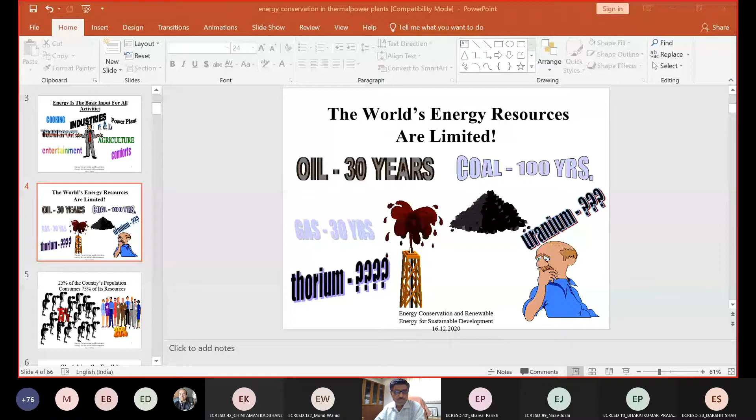Sir, sorry to interrupt you. I think the slideshow is not being shared. We are seeing the first slide only. Oh my God. Let me check again. And it is not in full screen, so we are seeing a small slide only. Is it now visible? Yes, sir. Now it is on full slide. And now it is changing. Okay, so let me brief the first slide.

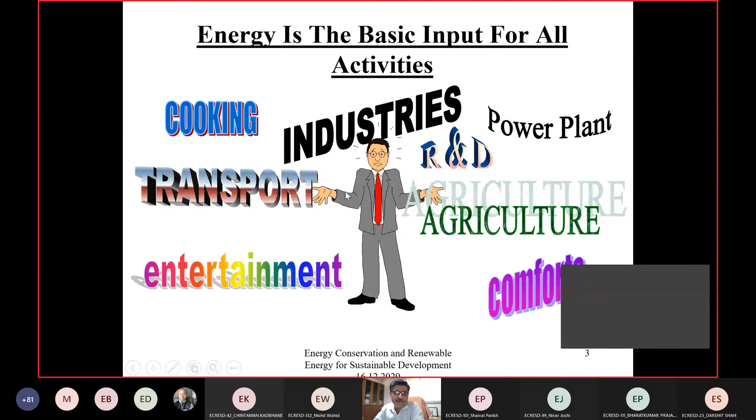What I discuss is about this, that we use energy in our day-to-day activities, and we need to map out how much energy is being used in each activity and how can we reduce the energy consumption as far as the conservation is concerned. And I was on this slide that typically, today we get mostly our energy from the conventional sources, be it oil, coal, or natural gas. Over and above, we use uranium, thorium, etc. to get the electricity.

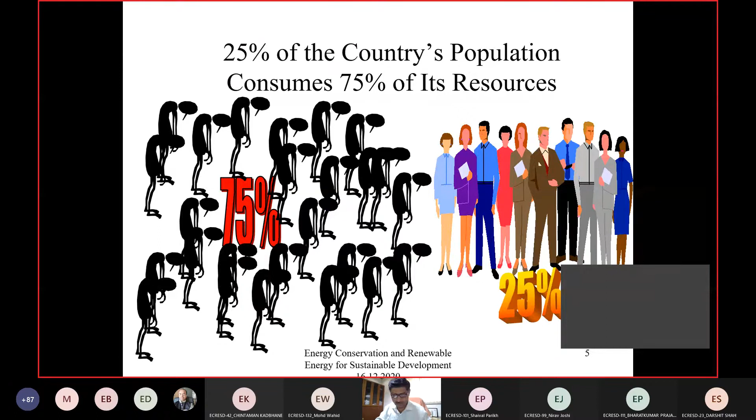On the world front, if you see, the total energy consumption by the developed countries is much higher as compared to developing countries. I will discuss that number later on. But just to give you an indication, our per capita electricity consumption is about 1200 to 1300 kilowatt hour per person. If you find the same for a US citizen or Canadian citizen, it may be about 20,000. So it is even more than 10 times. So the 75-25 rule also holds applicable, right, to these developing and developed countries as well.

Next issue we address: typically, in order to grow, any country has to increase its energy consumption. So we need to find out the different ways, different opportunities from where we'll get the energy. So on one side it is the energy crisis, and if you get rid of this energy crisis, you will get into the environmental crisis. So it's a twin issue: in order to get rid of one, we are getting the problem in the other. So we need to balance between energy consumption and environmental degradation at the same time.

Most of the environmental problems are related to energy utilization, and reducing energy consumption will certainly reduce our environmental problem to a larger extent. So if you can solve at least 25% of your energy requirement by energy conservation or by reducing energy consumption, probably we may address the environmental problem to a larger extent. I'll give you a simple example.

There was an article 3 days back in Gujarat Samachar, and it was cited that the total carbon emission of the world has been reduced by 240 crore metric ton this year compared to 2019. If you see the pattern over the past 10 years, this number has increased at the rate of 7%. But because of this corona pandemic, the total energy consumption has gone down, and in comparison to last year it has gone down by almost 7%. So with 7% increase every year and this time 7% reduction, ideally it has been a 14% reduction in comparison to the previous years.

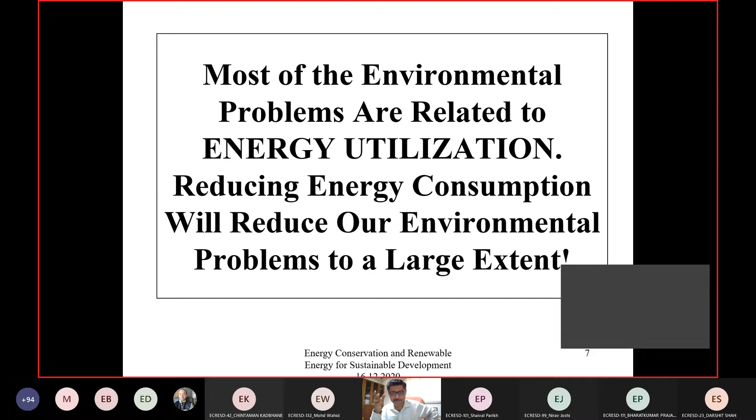China unfortunately pollutes the maximum. It is polluting double than the US and 4 times than India every year. The carbon emission per second at world level is about 1,000 ton. So you can imagine that the issue of the environment is much larger as compared to the issue of energy. If you solve one issue, probably you will jump into the other. So the only option is conservation. By conserving energy you can solve both: your energy demands are set off, and at the same time we are not polluting the environment.

Development of the nation is measured in terms of per capita energy consumption, whether we believe it or not, true or false. But obviously, in order to grow, in order to be in the developed countries list, you need to consume a lot of energy, because unless you consume energy, development is not possible. Any developmental activity ultimately leads to energy consumption. So more energy consumption means the country is more developed, will be using more energy, and will be polluting more as well.

On the contrary, if you see the total contribution of carbon emission, I would say 75% is from developed countries; hardly 25% is the real contribution of the developing or underdeveloped countries. So to increase per capita energy consumption, we'll have to be prepared to manage the related pollution issues as well, which are also increasing proportionately.

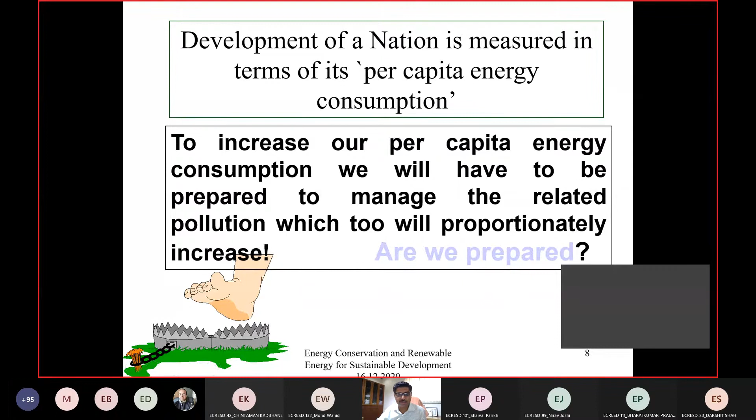Now here we'll try to define energy conservation. The first myth is that energy conservation should be considered as curtailment of energy use. Simply, if my energy consumption is 1500 kilowatt hour per year and I reduce it to 700, it is not conservation. Conservation is really meaningful if you are not compromising on the services. Suppose you have 4 tube lights in a room and you reduce it from 4 to 2, it is curtailment, not conservation. Rather, you need to maintain the total lumens of that workspace with other alternatives consuming less energy; that is really energy conservation.

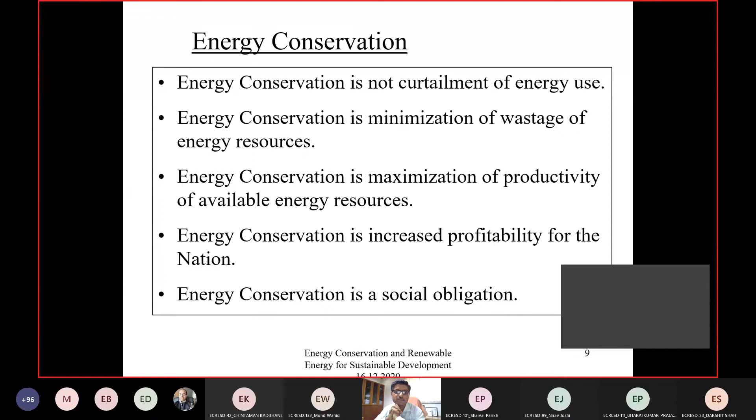So here we define energy conservation as the minimization of wastage of energy resources and maximization of the productivity of the available energy resources. It will ultimately lead to profitability for the nation, and obviously it is a social obligation. So for the betterment of society also, we need to conserve energy.

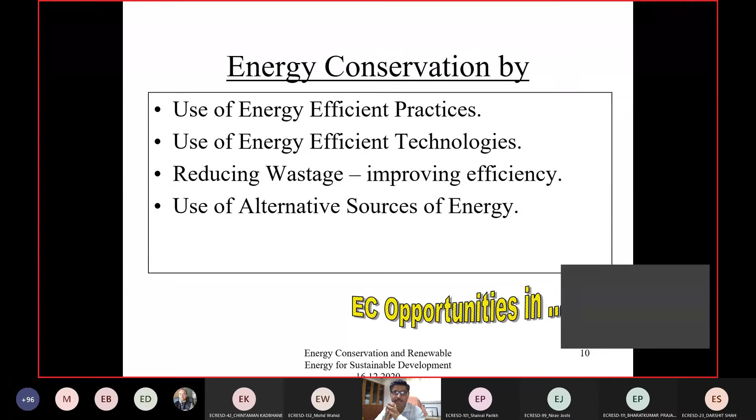Now we can conserve the energy by energy efficient practices and energy efficient technologies. We can conserve by reducing the waste and using alternate energy sources. So these are the 4 ways by which we can conserve the energy, and we can also address the pollution and environmental issues.

If we see the energy efficiency, generation is lagging behind requirement. In the Indian context, we still have a peak deficit of electricity of about 15%. Base deficit is about 7 to 9%. So you still have frequent power cuts in the villages. You don't have electricity access 24 hours. Farmers have electricity access for only 8 hours.

So even though we say Gujarat is an energy surplus state, if we really look into the energy demand by the farmers, as on date it is still not met. So our generation is much less as compared to our requirement.

Depletion of natural resources which are not renewable: we still depend mainly on them, as 75% of our electricity comes from the conventional route. Whenever 1 unit of electricity is consumed, 1 kg of coal is being used. So by thumb rule, every unit of electricity generation requires 1 kg of coal. And if you generate 1 kilowatt hour or 1 unit of electricity, typically we degrade the environment by 1 kg of CO2.

So it goes hand in hand: 1 unit requires 1 kg of coal, which pollutes the environment to the extent of 1 kg of CO2. So the environmental conditions are becoming worse every year. On the other hand, if you save 1 unit of electricity, it is as good as saving 2 units at the generation end, because mostly our electricity comes from the thermal route. Thermal power plant efficiency is about 25 to 30%.

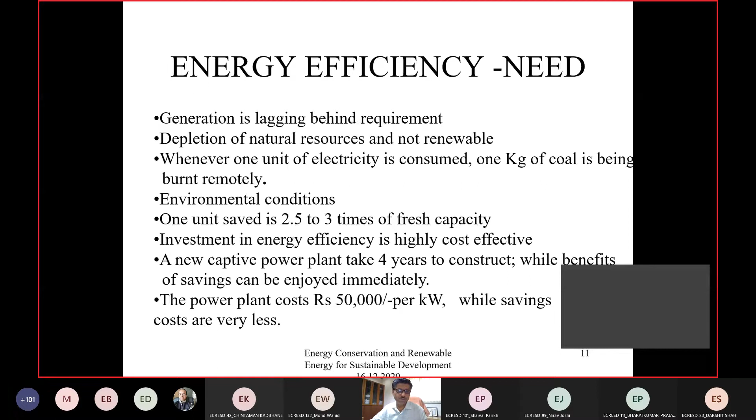Saving cost: yes, when we talk about conservation, you need to improve the efficiency of the machines, and that will not be free of cost. We need to invest, we need to put money. Sometimes we need to retrofit the existing setup. So it is not free of cost, but the cost of the saving opportunity is much less compared to the investment we would make creating new power plant infrastructure.

So we have seen the benefits of conservation. Then what are the barriers? Why are we still struggling to percolate this particular issue in society? One is the lack of awareness, education and training. So we need to have more sessions, right? Even it is difficult to educate the engineers, so understand how difficult it is to educate the common people.

There are several market distortions, economic distortions, lack of standardization. Of late we have started labeling the equipment as far as ACs and refrigerators are concerned. Now we have 3-star, 5-star rated air conditioners or refrigerators. But this kind of rating should be available for most of our electrical appliances. Lack of financing, lack of effective coordination. These are the several barriers to energy conservation or energy efficiency.

And most important is the feeling that everything possible has been done, that there is no more opportunity to increase the energy efficiency. That feeling has to go if we really want to move out of the barriers of energy efficiency. Every small step towards increasing the efficiency will ultimately lead to energy conservation. A mistaken feeling that energy monitoring and energy reduction equipment are expensive should also be removed.

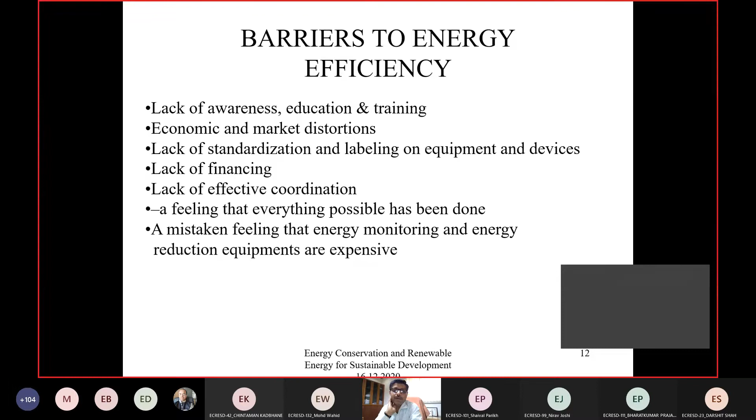As far as the Indian scenario is concerned, our energy intensity is poor as compared to the developed countries. Some numbers are cited over here. Energy intensity is defined as the amount of energy required to generate one unit of GDP. So lower the number, better the scenario. If my energy intensity is less, I can say that I am using less energy to generate the same unit of GDP.

So if you see here, we are consuming 3.7 times more than Japan, 1.4 times more than Asia, and 1.5 times more than USA. So our energy intensity needs to be improved, and we can improve it in two ways. Either you increase the energy efficiency of the existing equipment, or you need to find out where your GDP comes from. Being an agriculture based country, our GDP mostly comes from agriculture.

If you compare a country where the majority portion of GDP comes from the service industry, their energy intensity would be better, because in the service industry you need a room, a space, a computer and electricity, that's all. If your GDP comes from the manufacturing sector, your energy intensity will be poor, because you need to operate your machines, and that consumes a lot of energy. So energy intensity will be more where the major chunk of GDP comes from manufacturing. So this is one side.

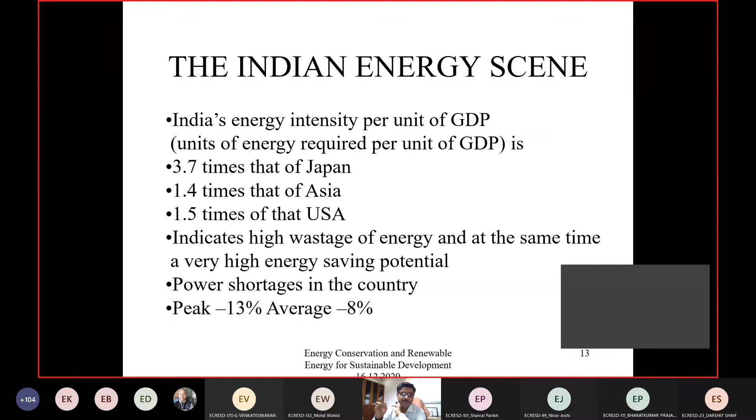This indicates high wastage of energy, and at the same time a very high energy saving potential as well. If your energy intensity is high, that means there is a larger potential for energy saving. So we can take that as positive, that we have a lot of energy saving potential. And as I said, power cuts are frequent. Here we have 13% peak shortage and 8% average shortage as far as India is concerned.

We are the second most populous country in the world, and we grow at an annual rate of 2%. This is very important because as the population increases, we need to increase our energy generation capacity as well. And since the population is large, our per capita energy consumption is less. It is 1200 kilowatt hour per person per year in comparison to 2000 kilowatt hour per person in China and 14,000 units for USA.

We are the sixth largest energy consumer in the world, and we expect our GDP to grow at the rate of 7%. No doubt this year our GDP is negative, but if you take the GDP growth from 2001 to 2020, the average growth is about 6 to 7%.

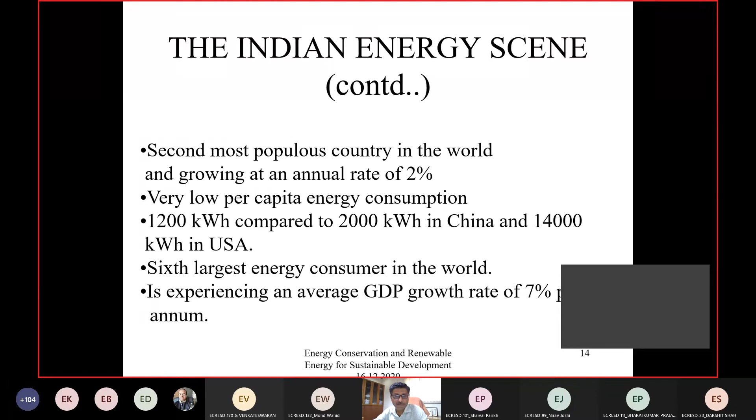As per the definition of energy intensity, if your GDP grows, you need to also grow your energy availability. So in line with the GDP, if you have the energy intensity number available, you can find out how much energy is required and what will be the growth rate required for energy as far as the nation is concerned.

So government has taken several steps. Since every 5-year plan, there is a separate section for energy, and the Ministry of Power takes care of that. All energy options are to be exercised to take care of the increased energy demand. However, in our context, coal has remained the mainstream energy source as of now and in future also, say till 2030 or 2035. I expect coal will be the major energy source in power generation.

Government has focused that new power plants may be either nuclear based or renewable energy based. So much emphasis is now given on nuclear and renewable energy as well. As far as hydro is concerned, most of the energy has been tapped, and by year 2025, the goal of the ministry is to tap almost 100% power from hydro. So hydro will be mature by 2025.

15% saving is to be achieved by energy conservation. So our energy demand is growing, right? Typically, suppose our energy requirement in the next 8 to 10 years increases by almost 70 to 80%. It is believed that whatever is the total generation capacity by 2035, we need to add the same number. So 100% increase is expected by year 2035, out of which 15%, if we can contribute to energy conservation, there will be a reduction in the burden of generating electricity through thermal or other routes.

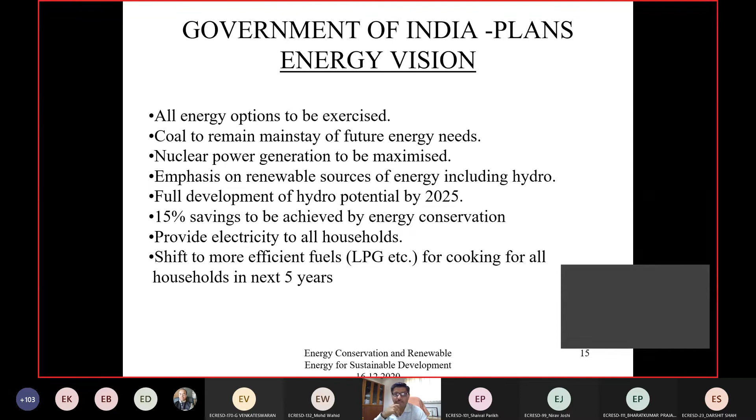It is also envisaged, as per government plan, to provide electricity to all households and to shift to more efficient fuel, that is LPG, for cooking for households in the next 5-year plan. So this is typically the energy vision of Government of India for the next 5 years.

Now, what is the solution? We must use all available fuel options, be it nuclear or non-conventional sources, under comprehensive NEP. There must be pursuit of improving energy efficiency at all stages, not only at our consumer end, but at generation and also transmission end, because as I said, our transmission and distribution losses are 16 to 20%.

If you see the same number for developed countries, it is hardly 3 to 5%. So we need to improve our transmission lines. We need to improve the efficiency of the generation machines, and not only that, we also need to improve the efficiency of the machines at the consumer end. It is believed that 2.5 units of capacity addition may be avoided if you save 1 unit of electricity by any of these means.

Investment in energy efficiency measures is cost effective and sustainable. Improving energy efficiency would be the most effective method to tackle the shortfall and sustain the country's growth trajectory. It is also far less expensive to save energy than to generate new power. And by doing this, we can save almost $1,200 million every year for India.

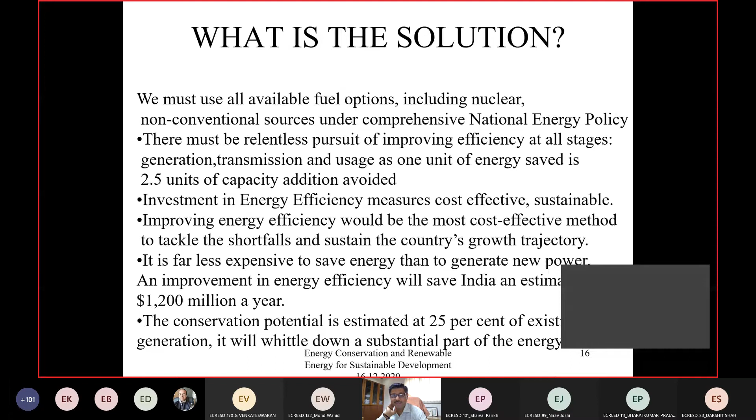The conservation potential is estimated at about 25% of the existing generation that we discussed, that in time to come we need to improve upon our energy generation capacity. But if we go for energy conservation, at least 25% of total new generation capacity requirement can be reduced.

Now, having discussed energy conservation and its other issues, let us focus on how to conserve energy in our thermal utilities. So here I will discuss first pump, then compressor, and finally we will have the discussion on boiler.

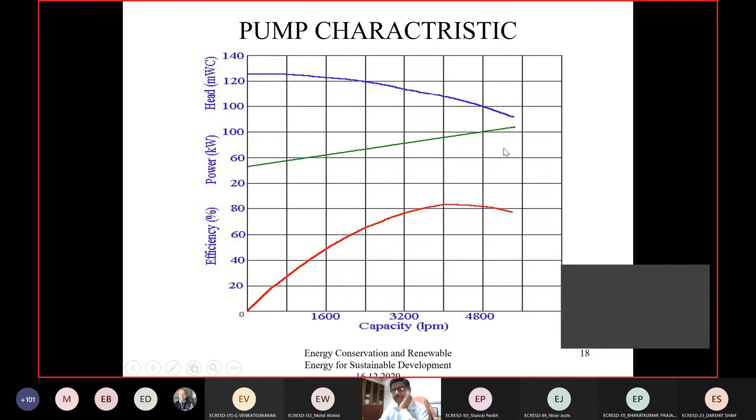If I increase the capacity, obviously the head will decrease because total power is rho G Q H. Rho G is constant, so if I increase Q, H will obviously decrease. So depending upon our head requirement, we need to choose a pump from the pump characteristics that at a given discharge satisfies the given head requirement as well. Power increases with the increase in capacity, that is but natural.

So if you go through whatever I have discussed, the last point indicates that pump efficiency with flow decreases, and maximum efficiency is significant as compared to motor. Motor part load efficiency is good, but in case of pump, part load efficiency is very poor. So if I operate my pump at 50% flow rate, then efficiency will drop by 20%.

There is a straight reduction in efficiency, and this 20% decrease in efficiency straight away means that you are consuming almost 20% more power to operate the pump. However, if your efficiency is not decreased, then typically you can save the power. So that gives you the energy saving opportunity in case of pump.

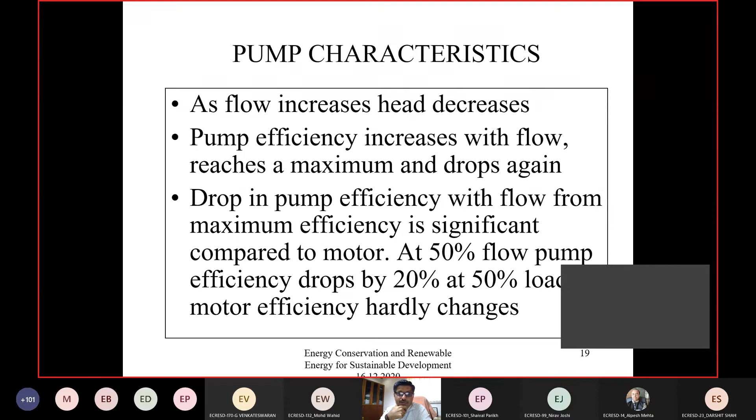I need to operate my pump in such a way that even if my discharge requirement decreases, the efficiency should not fall. However, we have discussed through pump characteristics that for a given speed, if I decrease the discharge by throttling it, the efficiency has to decrease. That is the negative part. So we need to identify, or find out the ways, where I can reduce the discharge and at the same time my efficiency of the pump will not decrease.

The other characteristic which is very important is that at zero load, the pump also consumes almost 30 to 40% of power. Whereas if a motor is operated at no load condition, the total power required to operate the motor will be 5% of the full load. So motor is not the culprit, as far as the pump motor system is concerned, if I talk about the system as a whole. Pump is the real culprit, where we need to work on how we can increase the efficiency of the pump. Hardly can you increase the efficiency of the motor.

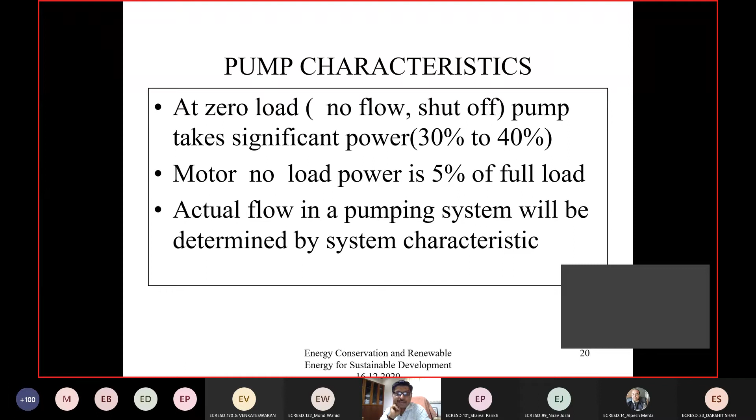So in actual flow in a pumping system, rather than talking about the pump characteristics, we should address the system characteristics. Here both characteristics are shown. This red color indicates your pump characteristics, the head versus discharge. While if you see the system, the blue color line, at zero load, the head is almost 40, which is the static head.

When you throttle it, or rather when you increase the flow rate, the system head increases, and that increase in the system head will be the square of the velocity. We know the frictional head, if total head is the sum of the static head plus frictional head, and frictional head by Darcy's formula, 4FLV squared by 2GD, is proportional to the square of the velocity. So more flow in the same cross section means more velocity. If you increase the capacity, obviously frictional head will increase.

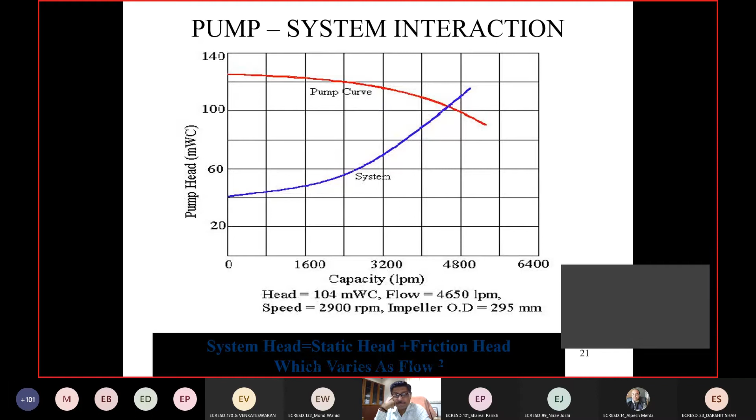And the intersection of pump and system characteristics will give you the best efficiency point. So if you plot your efficiency curve, probably you will get the maximum efficiency at that point. This gives you typically the centrifugal pump characteristics for the given model and given condition.

So all these typical lines indicate the head versus discharge characteristics at different RPM. And if you rotate your pump at different RPM, obviously you need different power. So I could say that this is also a power versus discharge characteristics curve, and these parabolic curves are your constant efficiency or ISO efficiency curves. So if you have all these three pieces of information, you can find out the best operating range. If suppose my requirement is 150 gallons per minute, or about 35 meter cube per hour.

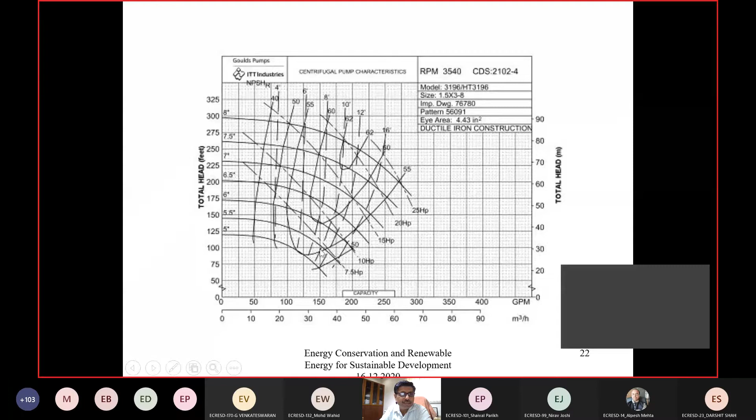So you can get that combination at various rotational speeds. If you operate your pump at 25 HP, getting that particular thing, obviously head will be more, but we are not required that. Suppose my head requirement is only 100 feet. So rather than operating at this particular point, I can choose to operate my pump at a 7.5 HP line, or this particular speed, so that the total power requirement will be less.

So it will be more and clearly visible over here. Here I have taken one reference pump characteristics and one reference system characteristics. Let us assume I am operating my pump at this. So at present my flow requirement is 12,000 liters per minute. Now if I want 12,000 liters per minute, and if I am operating over here, the efficiency is about 86%. Now suppose your flow requirement reduces from 12,000 to say 9,000.

So one way is to throttle your pump. In that case, you operate the throttle valve, restricting the flow, but your pump may operate at the same speed. So in that case, your pump characteristics will follow the blue line. From this reference operating point, now I'm shifting my operating point to this end.

At this point, suppose you have the ISO efficiency curve corresponding to 84%. If I want to find out how much total power is used, the area under the head discharge characteristics will give you the total amount of power. So this rectangle, if you find its area, will be the amount of energy required to operate my pump at this head and discharge combination.

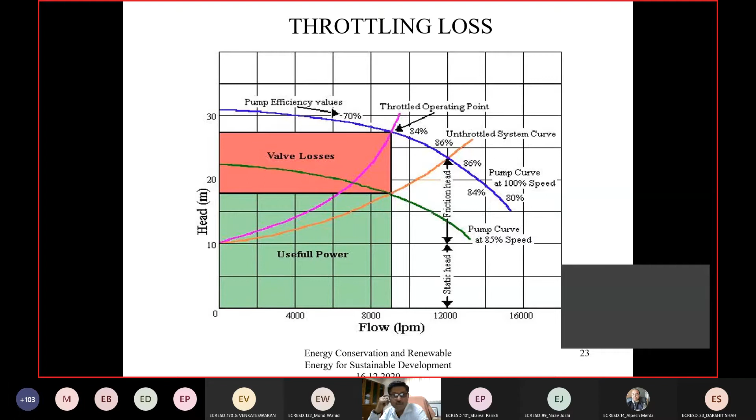Obviously, if your requirement is 9,000 LPM and about 28 meters of head, I can't do that, because if you operate at 85% speed, as per this particular characteristics, your head will be about 18 meters. You cannot get 28 meters of head. So in that case, at the cost of energy, I need to go for the other option, the throttling option. So depending upon how much your head requirement is, we can play with either this flow regulation, either by throttle mechanism or by this VSD, variable speed drive mechanism.

Here it gives the comparison. Now for the previous case, what if you are operating your pump from 12,000 LPM to 6,000 LPM by throttle mechanism? If you see, if you throttle, your pump efficiency has decreased from 86 to 69%. As I said, the part load efficiency of the pump is poor. At the same time, the motor efficiency is hardly affected. Your motor efficiency at 12,000 is 90%, and at 6,000 it is 89%, hardly 1% reduction in motor efficiency.

So if I operate my pump at 12,000 LPM, I need about 59.65 kilowatt of energy. And suppose this flow requirement is reduced to 8,000, and you operate through your throttling mechanism, your total input power will be 55.61. So there is not much reduction in power consumption.

However, I have reduced my flow requirement by more than 25%, right? It is 1/3. So reduction in flow rate is 33%, wherein the input power is hardly reduced by 4%. So that is the case with the performance with the throttling devices.

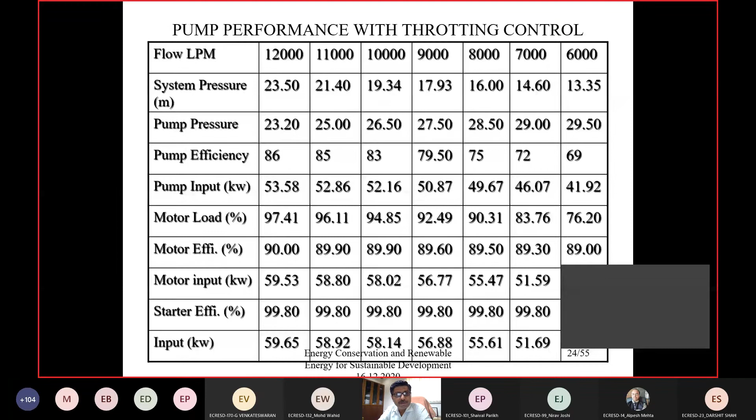As I said, any conservation is not free of cost. If I want to go for this variable speed drive, if I want to change the pump speed, I need to go for the VFD, and this VSD is an additional component in my existing system. So you need to invest in the VSD. Suppose a VSD costs 5 lakh rupees, and your saving potential is of the tune of 50%.

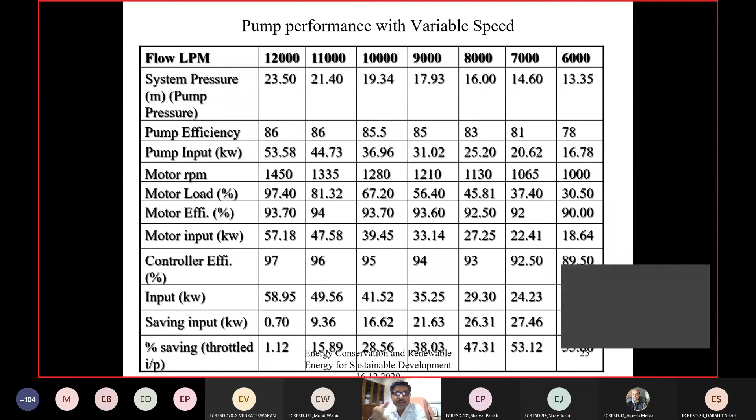That is, you are saving 26 kilowatt. If you operate your pump for at least 10 hours, you are saving 260 kilowatt hour multiplied by 5. So almost 1250 rupees a day. So if you compute your simple payback period, it will be less than 1 year. Whatever we invest, that investment is fruitful if the payback period is less than 4-5 years.

So here, energy saving opportunities in high efficiency pumps and fans. Similarly, if you talk of fans, which handle air, the principle is almost same. One is a compressible flow, the other is incompressible. In case of pump, avoid the throttle. In case of fan, avoid the damper, and we can go for either the VSD, or impeller trimming, change of the impeller, or proper size of the pump. Other three options through which we can save the energy.

Sometimes you already have a pump which was purchased years back, and now your flow requirement drastically reduces. You thought that your requirement will be 12,000 LPM, and now you know that your requirement will not go beyond 6,000 or 7,000. So in that case, rather than going for VFD, you can also think of impeller trimming or change of the impeller, because your requirement is fixed. Either you go for a new pump or you go for the proper size of the impeller.

In case of impeller trimming or change of the impeller, your casing remains same. Only you are going for a smaller diameter impeller, because your flow rate is proportional to diameter. So my flow rate has reduced. So it is not a good option to buy a pump, but to buy a new impeller. So you change to an impeller of smaller diameter.

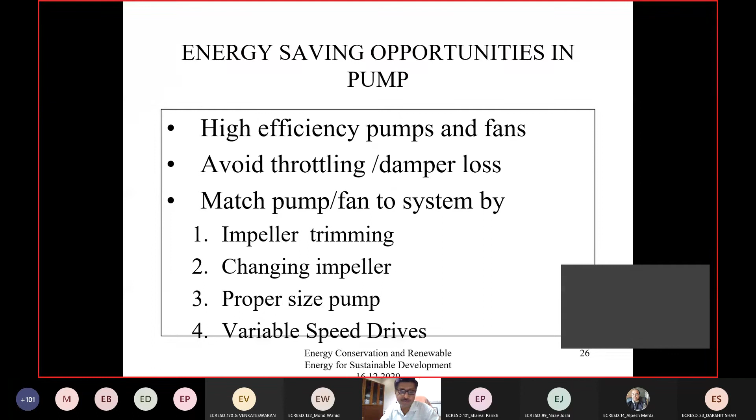These are the ways we discussed: impeller trimming, small impeller, smaller pump, or variable speed drive. Now see here, this is a very good comparison. As I said, controlling the flow rate by speed control is a better option in comparison to throttling. That can be seen from here. We know your flow rate is directly proportional to speed, head is proportional to the square of the speed, and power is proportional to the cube of the speed.

So if I want a 10% reduction in my flow rate, from 100 to 90%, I need to reduce the speed of the pump in the same fashion, a 10% reduction in speed, which will reduce your head by 19% and power consumption by 28%. So if your head requirement is within the limit, it is better to operate your pump at lower speed to get better power. That is, your power saving is almost 28%.

Similarly, if it is a 30% reduction in your required flow rate, your power saving is almost 66%. And if your flow rate requirement is 50%, power saving is as high as 87%. So here you can see, if you go for throttling, you will be consuming the same power. But if you go for reduction in speed, your power reduces by typically 87%. So there is huge potential as far as operating pumps is concerned.

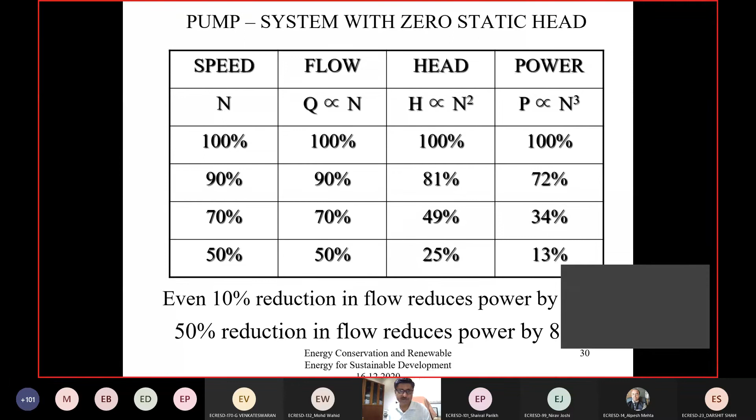So if you own a company and have a large number of pumps in your plant, say in a power plant we also have a lot of feed pumps, depending upon the fluctuations in load requirement, if you throttle the pump, that consumes a lot of energy. So this is a way by which we can conserve energy. For variable speed drives, the saving potential is 10 to 70% and the payback period is hardly 1 to 2 years.

As far as the fan is concerned, we also need to choose a particular fan for the right application. If you see the efficiency range, different fans have different efficiency ranges. Open radial may give up to 60%, closed radial 65%, radial with inducer diffuser 75%. If you use backward curved vanes, it is up to 85%, and aerofoil 90%. So we need to understand what kind of fan is really required for the right application. If you choose a wrong one, you'll jump into lower efficiency and higher energy consumption.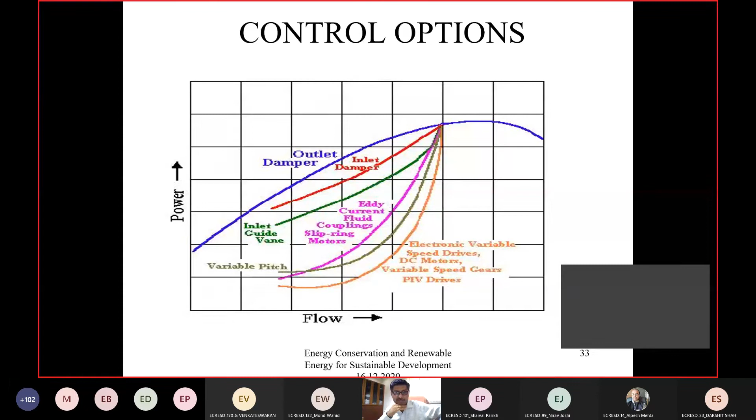So throttling is never a better option. Rather, you can go for the inlet damper or inlet guide vane. There are various options available for controlling the airflow rate. But speed drives, DC drive or variable speed drive mechanism, are better as compared to the others.

If you talk about compressed air, there are several facts about compressed air. Compressed air is the costliest utility in any plant. Air is free, but compressed air is not. Compressed air is considered to be colorless gold in the industry because we consume a lot of energy to compress the air. So we need to understand that since you increase the pressure of air, there should not be a leakage.

Ultimately, this leakage will result in a loss. It is estimated that a 3 mm hole will result in a 26 CFM leak at a given pressure, with a financial loss of maybe about 2 lakh per year. So we need to take some steps to arrest the leakage.

One is you can identify the leakage through the noise; noise also identifies the leakage. We can conduct the leak test at least once a fortnight and record the quantum of leak area-wise. Many times we cannot get rid of leakage, but if leakage is of a higher tune, we need to address those issues.

We have to use the optimum nozzle size. For different applications or machines, we need to have different nozzles as well. That means the right pressure is to be used for the right application. It should not be that you have a centralized compressor plant, compress to the maximum possible level, or to whatever your application consuming the most compressed air needs, and then wherever lower pressure is required, depressurize the air.

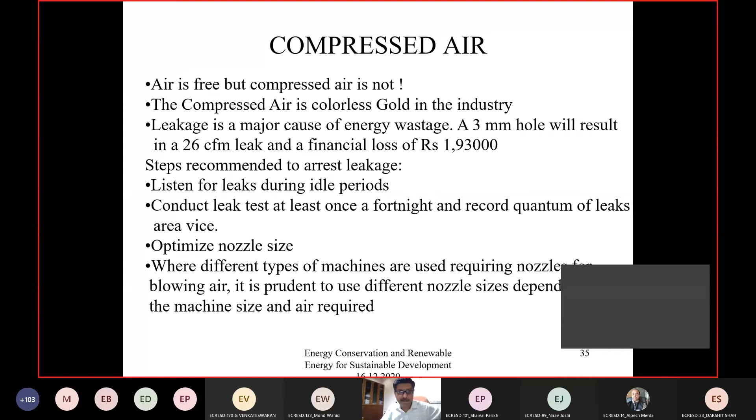Typically we waste energy in compressing and decompressing for low pressure applications. If my requirement is 100 psi and you use 120 psi, you are consuming almost 10% more energy. So in industry, we need to segregate high pressure and low pressure compressed air requirements, and depending on that, think of having a centralized plant for compressing the air.

Depending on the requirement, you may segregate the application and the pressure range, and accordingly go for that. We need to create awareness by displaying posters on leakage as well. The best option is to depute a service person, make him responsible for attending to all the leaks, and ensure almost zero leak of compressed air at any given time in the industry.

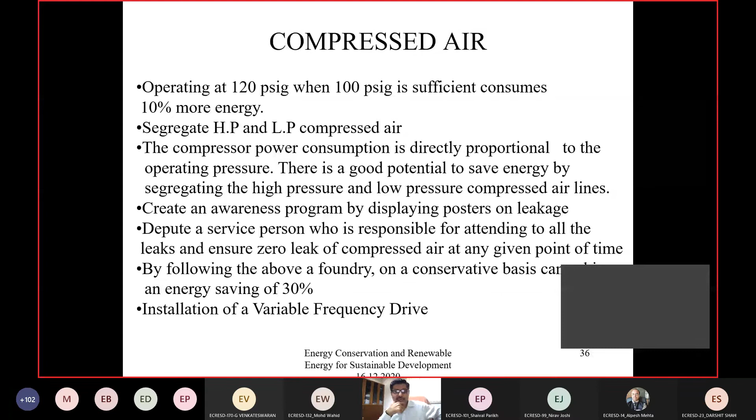If you follow these steps, we can conserve energy up to 30%. And installing a variable frequency drive in the compressor also serves a purpose, because the total power consumed by the compressor depends on the rotational speed as well. So depending on your pressure and flow requirement, we can set the limit, and the variable frequency drive may be used.

Essentially, centrifugal compressors are most efficient, but depending on application, we need to use reciprocating and screw compressors as well. A straight comparison: for a 7-bar application, a typical reciprocating compressor will consume 16 kilowatts compared to 14 for centrifugal. So there is less energy consumption in the centrifugal compressor, and at lower pressure, 3 bar, it is 8.5. These numbers are for 100 CFM capacity. Centrifugal compressors are expensive, but their operating cost is less. So it's a trade-off between the initial cost and the operating cost.

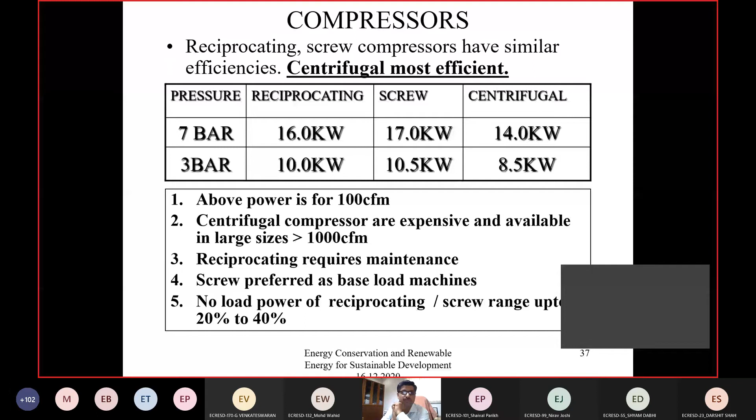Reciprocating compressors require more maintenance compared to centrifugal compressors, whereas the no load power of reciprocating and screw compressors is up to 20 to 40%; it will be less in the case of centrifugal. So for an application where your pressure requirement is higher, there is no choice other than reciprocating, but if your flow requirement is larger, you can go for centrifugal compressors.

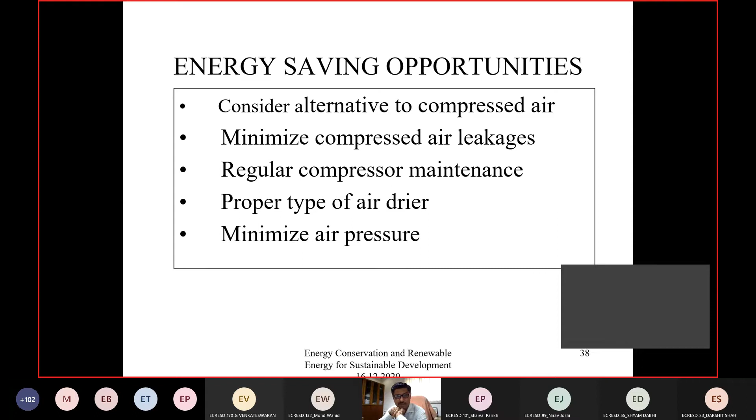Energy saving opportunities for compressors: consider alternatives to compressed air, minimize compressed air leakage, regular compressor maintenance, proper type of air dryer, minimize the air pressure, etc. There are some alternatives to compressed air. The best way to conserve energy with compressed air is not to use it wherever it is not required. Wherever we can serve the purpose by vacuum, use that in place of the compressor.

Minimize the air pressure if it is used for cleaning. As I said, your central plant may give 7 bar, but if 2 bar is required, you should have a separate facility to generate 2 bar pressure. Go for mechanical transport of material in place of pneumatic transport in the cement industry, paper industry, etc., which will save up to 80%, and use electrical tools in place of pneumatic tools.

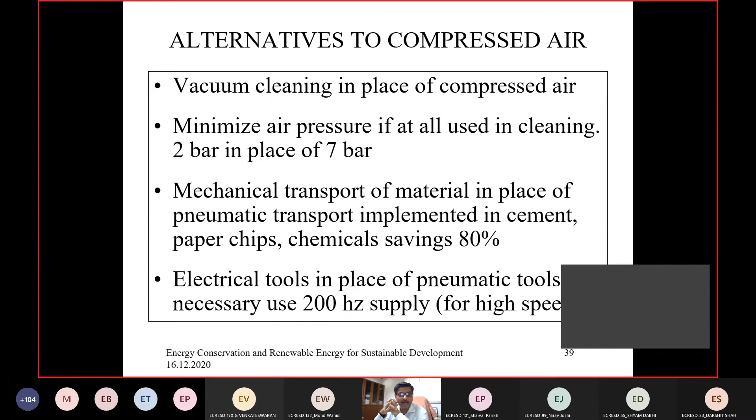So there are several alternatives to compressed air. Leakage is very important. If you have line leakage, then it's a double loss: you lose your compressed air, and at the same time you are using additional energy to compress that air which is not being used. So if you see the comparison at 3 bar pressure, if the hole size is 1/64 inch or 1/4 inch, right?

The quantum of air leakage is 0.211 and 54 CFM respectively, which will ultimately result in an annual cost, considering 8,000 hours of operation and 5 rupees as the cost of electricity, of 826 rupees for 1/64 inch, whereas a 1/4 inch leakage will result in more than 2 lakh rupees. So that gives you an indication that the smaller leaks need not be paid much attention. 826 is not a big amount, right? If you just see the cost to benefit ratio, it will be negative in the case of a 1/64 inch hole.

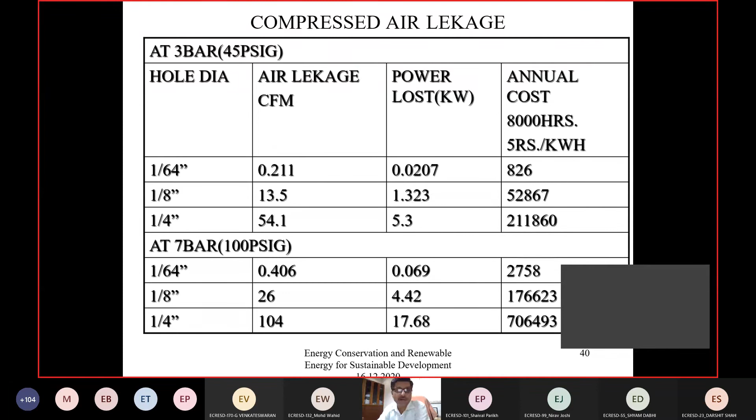But at the same time, if we compare the same loss at a pressure of 7 bar, that is, suppose your application is at 3 bar but you compress it up to 7 bar and then depressurize it to 3 bar, then even a single small hole of 1/4 inch will result in an annual loss of more than 7 lakh rupees. And sometimes this cost may be more than the cost of the compressor also. So we can sizably reduce operating cost if we are vigilant, look around, and reduce the leakages in the case of the compressor.

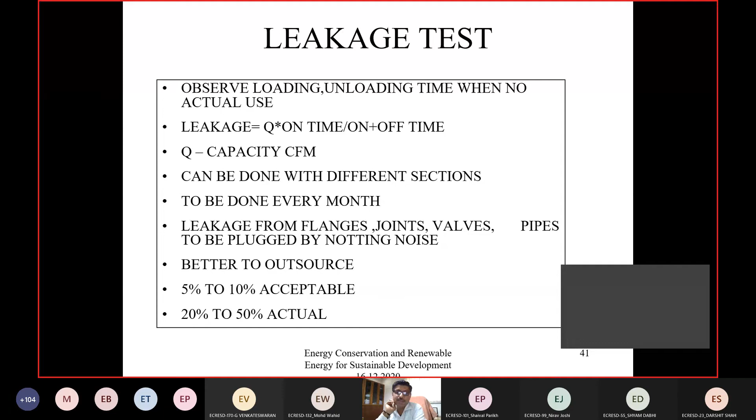As far as industrial practice is concerned, 5% leakage is acceptable. But in reality, these leakages are of the order of 20% to 50%. So we'll be required to address those issues, and this has to be reduced from 20 to 50% to 5 to 10%.

Now, as far as boilers are concerned, the boiler is also a very important thermal utility, and in industry, be it chemical, mechanical or thermal power plants, boilers are largely employed. They are used to convey heat to different process applications, and steam is commonly used as a heating medium. So we produce steam, and in the case of steam, the important parameters are temperature and pressure. Depending upon the application, we need to maintain those.

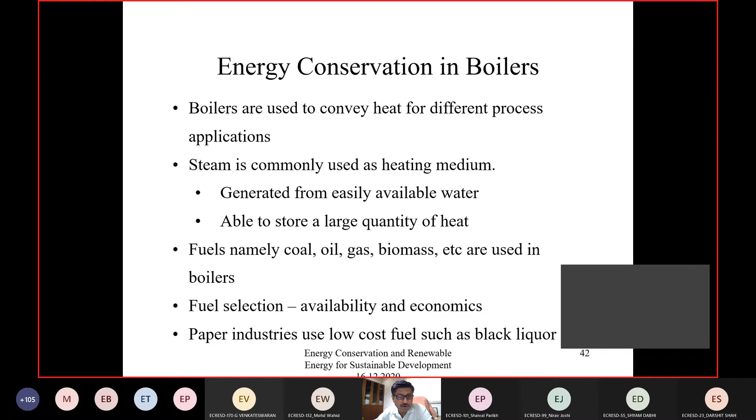Fuels used are mainly coal, oil, gas, biomass, etc. And fuel selection typically depends on both availability and economics. Sometimes we sacrifice efficiency if a low grade fuel is available in plenty at lower cost in the nearby region. The paper industry also typically uses low cost fuel.

As far as efficient steam utilization is concerned, we need to prevent steam leakages. We need to provide dry steam for the process, with less moisture content, utilize steam at the lowest pressure, and ensure proper insulation of the pipelines. Condensate recovery is also important. We need to recover the flash steam, with proper selection and maintenance of steam traps, and proper sizing of the pipelines. If you pay attention to this, you can save energy, right?

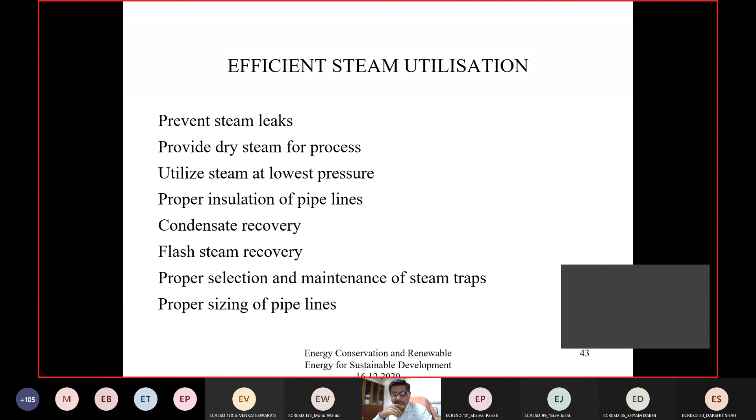Typically it will reduce the steam consumption, and in turn it will reduce the burden on the boiler and we can save a lot of fuel. So utilize steam at the lowest pressure. From the steam table we can show that the latent heat reduces as pressure increases, and latent heat is useful in the heating process. So it is useful to keep the pressure as low as possible.

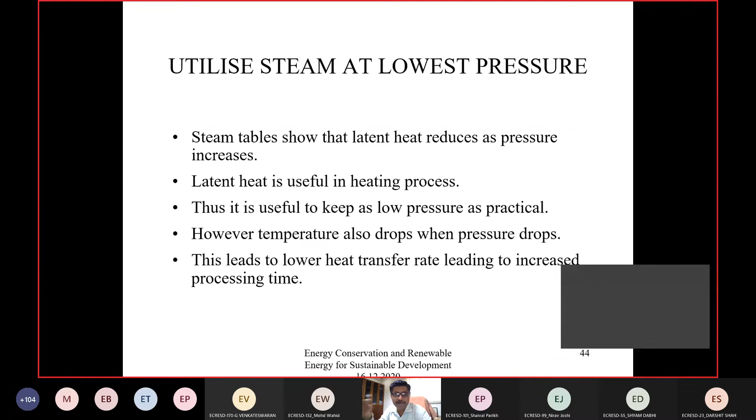However, temperature also drops when you lower your pressure. So, as I said, we need to work in sync with both temperature and pressure, and find out at what temperature and pressure we need to operate our boiler, depending upon the pressure loss and temperature loss in the line for the final applications.

Insulation is also important. So if you properly insulate the pipeline carrying the steam, we can also save a lot of money. An example is cited: a 150 mm pipe at 300 degrees centigrade, considering ambient temperature to be 30, the heat loss is of the order of about 3,400 kilocalorie per meter per hour. If you go for the 25 mm insulation, it reduces to 505, and with 100 mm insulation it will be 191. So the thickness of insulation should be decided on the basis of your economic trade-off, whether you want to reduce up to 191 or up to 232, right?

So depending upon the heat loss, if you go for 25 mm, your total heat loss will be 505. If you go for the 100 mm, heat loss will be 191. So 100 mm insulation obviously will require more money. The capital investment is much higher as compared to 25 mm insulation. On the other hand, you are also saving heat of the tune of about 300-350 kilocalorie per meter per hour, depending upon the number of operations or the uses of that particular utility in a year, so we can take the decision whether we should go for 50 mm or 100 mm. Obviously, take care of critical thickness in that case, otherwise it will go the other way.

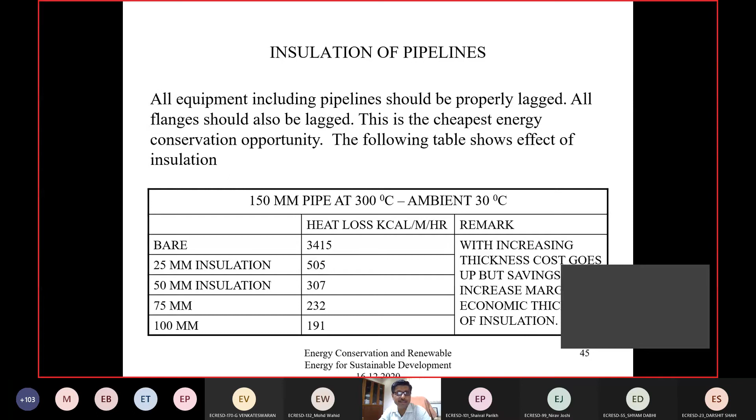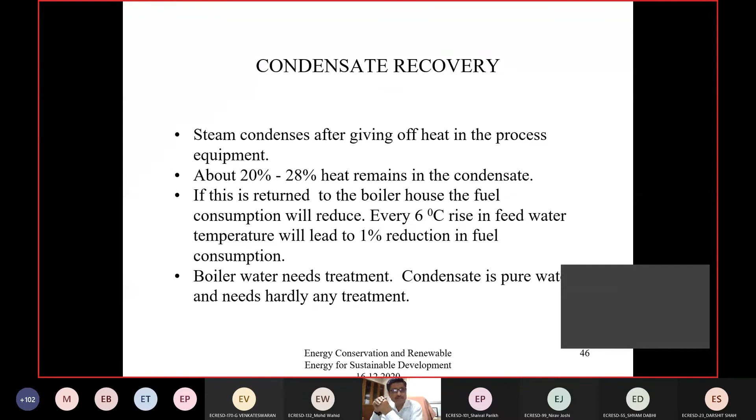Condensate recovery also will conserve the energy in case of boiler, because if you conserve the condensate, your boiler load will reduce. Steam condensate, after giving off heat in the process equipment, about 20 to 28% still remains with the condensate. If the same condensate is used, we need to provide less fuel in the boiler. Boiler water needs treatment, and condensate is pure water. So in a way, the fresh requirement of water will also be reduced. So you are getting both advantages: you save energy in the form of heat, and at the same time fresh water requirements also go down.

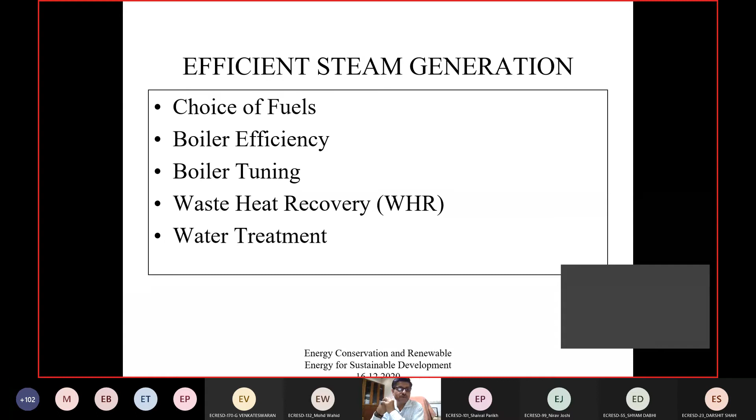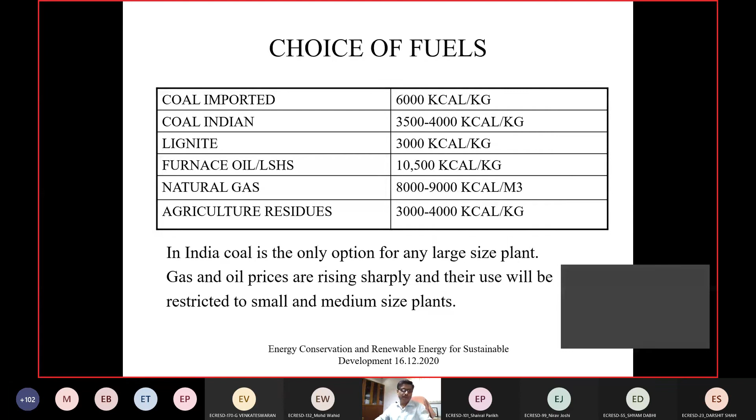So efficient steam generation may be addressed by choice of fuel, boiler efficiency, boiler tuning, waste heat recovery, and water treatment as well. Choice of fuel: we have different fuels, and different fuels give you different energy. Some fuels are marked here. Coal has heat value ranging from 3,000 to 6,000 kilocalorie, depending upon whether it is imported brown Australian coal or Indian coal or lignite. Furnace oil has about 10,500 kilocalorie per kg. Natural gas 8,000 to 9,000. Agriculture residue 3,000 to 4,000. So depending upon the locally available energy source, we can think of the boiler design and the use of fuel for the given application.

Boiler efficiency ranges from 65 to 85%, and this is a very important parameter. Your coal consumption or fuel consumption largely depends on the boiler efficiency. Taking care of the steam leakages will reduce the steam generation requirement, and in turn reduce the fuel consumption. On the other hand, if we increase the efficiency, your steam generation will be the same, but with lesser fuel. Even if you can increase the efficiency of the existing boiler by 1 to 2%, you can save a lot of fuel. So whenever we analyze boiler performance, the target is to increase the efficiency not by 5-10%, hardly by 2 to 3%, because you cannot increase boiler efficiency to the tune of 10% or 5%.

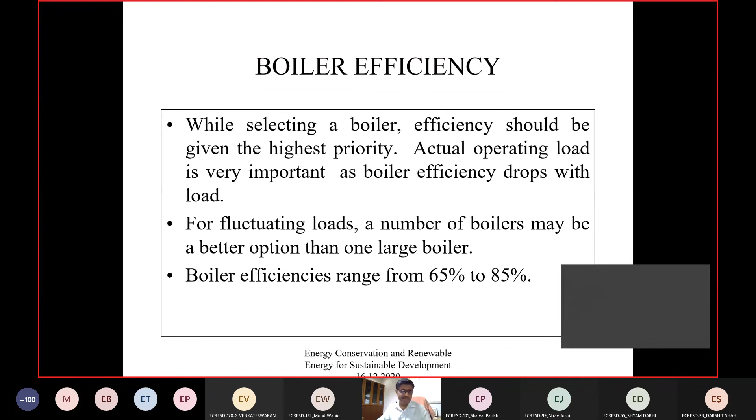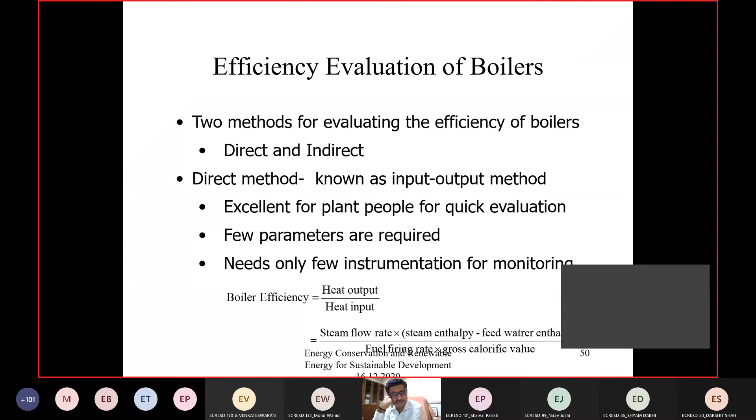So if I want to increase the boiler efficiency, I need to identify where the losses actually are. If I use the definition of efficiency as heat output versus heat input, probably I'll get no information, because my output is in the form of steam. So I'm measuring my steam flow rate and steam enthalpy, and vis-a-vis how much coal or fuel is used with what calorific value. If you analyze boiler efficiency with this direct method, you will probably miss where losses are happening. So the indirect method for boiler efficiency gives us an indication of where the losses are, and if we address those losses, we can increase the efficiency.

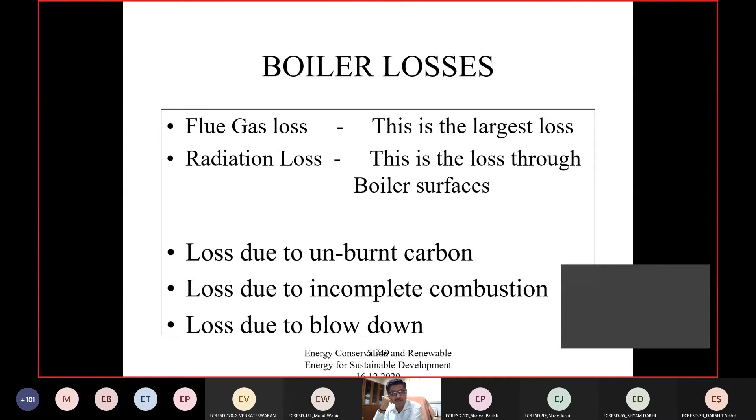So these are the several losses in terms of flue gas loss, radiation loss, losses in unburned carbon, incomplete combustion, blowdown, etc. This gives the typical thermal efficiency level we discussed earlier.

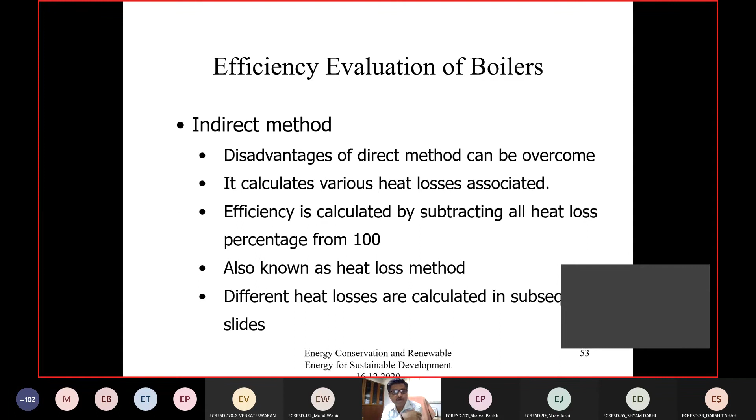As I said, if you use the indirect method, rather than getting efficiency by the direct efficiency formula - ratio of output versus input - we use the definition where you quantify all the losses and subtract it from 100. Typically it will give the same efficiency.

So in order to calculate dry flue gas losses, which is the prominent loss, we need to quantify two things: what is the CP value of dry flue gas, and what is the mass of dry flue gas.

Here, flue gas temperature is required, MCP delta T. If you use this equation, the temperature difference between the flue gas and the ambient will be required to calculate the loss, or the heat loss carried away by the dry flue gas.

So obviously, it's chemistry. Whenever you use any fuel, the fuel is comprised of carbon, hydrogen, nitrogen, sulfur - CHNS typically. When we combust the fuel, it reacts with oxygen and generates oxides along with heat release. Carbon will be converted by reacting with oxygen into carbon dioxide. All these reactions are exothermic.

From there, using the chemistry, I can evaluate from my fuel analysis - the CHNS analysis of the fuel - how much theoretical air is required to combust 1 kg of fuel. But we know that this stoichiometric air requirement is highly theoretical, and if you supply that much oxygen, you will end up with incomplete combustion and a lot of carbon monoxide generated.

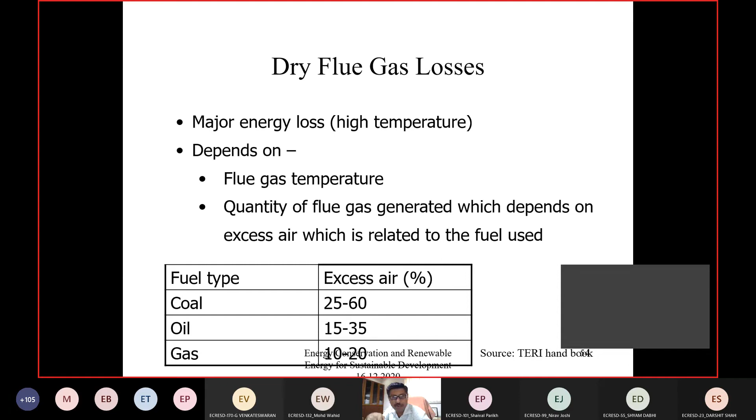So we need to provide excess air, because theory is based on several assumptions - your combustion chamber may not be 100% efficient. So the thumb rule, taken from the TERI handbook, says that if you use coal, typically 25 to 60% excess air is required, depending on type of coal. Oil requires 15 to 35%, and gas requires 10 to 20%. So your theoretical calculation should be supported along with this excess air calculation.

As far as theory is concerned, the stoichiometric air requirement - from your CHNS analysis of the fuel, using an equation again taken from TERI - gives the theoretical air per kg of fuel. So you end up with the stoichiometric air requirement per kg of fuel, and excess air may be evaluated.

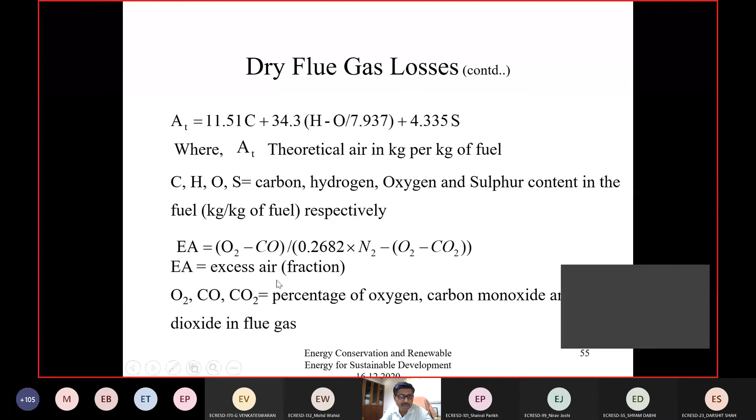If you do not want to use the numbers given in the earlier table, you can also calculate the excess air based on this particular equation, and from that I'll end up with the amount of carbon dioxide generated. I know the oxygen, so that gives CO2 as a function of amount of oxygen.

Basically this O2 you will get from your Orsat analysis - the flue gas analysis you need to do - which will give the amount of flue gases. It's a mixture that gives the concentration of carbon dioxide, oxygen, sulfur dioxide, etc.

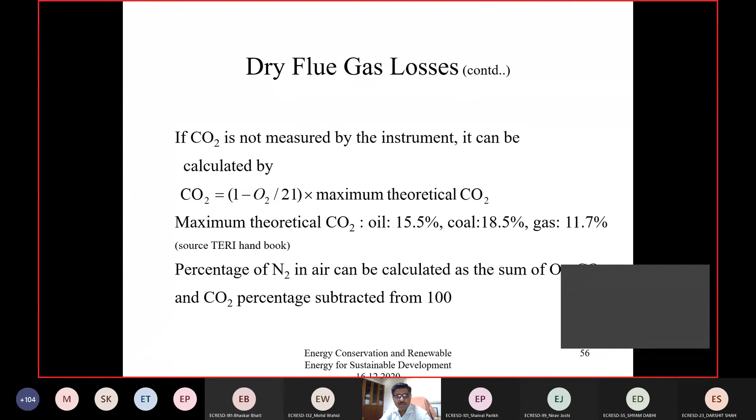And if you do not have the Orsat analysis, you can take typical numbers, again from TERI: if you use a coal-fired boiler, 18.5% is maximum theoretical CO2; if oil-fired, it's 15%; gas-fired, it's 11%; and the rest is nitrogen. So I can get my amount of oxygen.

So likewise, you can evaluate, for the given temperature of the dry flue gases and the given composition of your fuel, how much will be the heat carried away by the flue gases. Once you get this heat carried away by flue gases, I can also evaluate the percentage loss in efficiency, since I know what the input is, and the units will be the same.

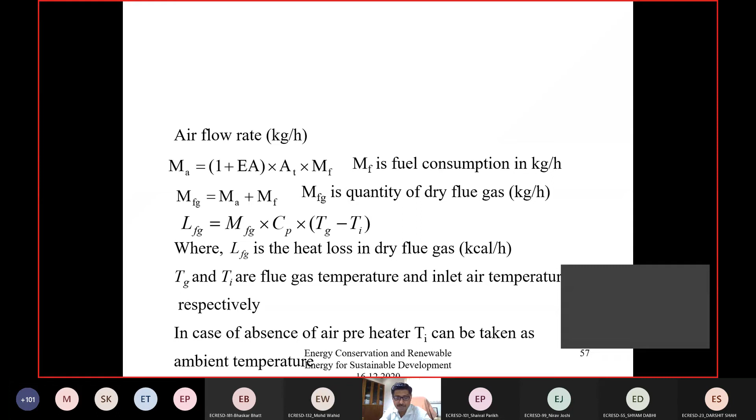So if you use this number vis-a-vis the total energy input given to the system, I can calculate how much is the percentage loss in efficiency because of the heat carried away by the flue gases. Similarly, I can calculate the heat loss due to the moisture content in the fuel.

You find out from your moisture content apparatus what percentage your coal contains, and finally I can convert that into kg of fuel. So if the percentage is 5, I can say 5 gram of moisture content is in 100 gram of the fuel. So this moisture content in the fuel is readily known to us, and I know the mass of fuel and the rate at which I am consuming it.

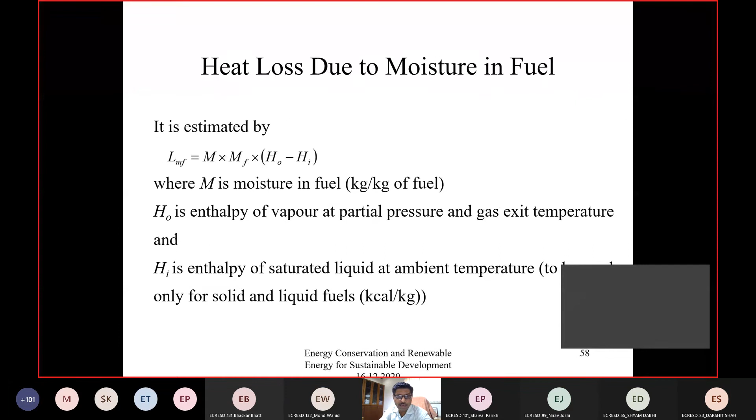HO and HI, this enthalpy, we may calculate on the basis of temperature and pressure. If you use this, you will get the amount of heat lost in order to evaporate that particular moisture, because you have suppose 5% moisture in the fuel. So when you burn this fuel, because of the moisture present, some heat will be used just to convert that trapped moisture into vapor, and that is a loss we need to identify.

Next loss is loss due to the burning of hydrogen. Each fuel mainly consists of C, H, and S, and as hydrogen burns it is converted into water vapor, H2O. So just as moisture reduces or some heat is lost in the moisture content in the fuel, similarly there is a loss because of water vapor generation from hydrogen burning.

And we know, 1 kg of hydrogen: H2 plus half O2 gives H2O, so 1 plus 8 is equal to 9. Typically, 8.937 kg of water is produced from burning 1 kg of hydrogen. So that is a multiplicative factor over here.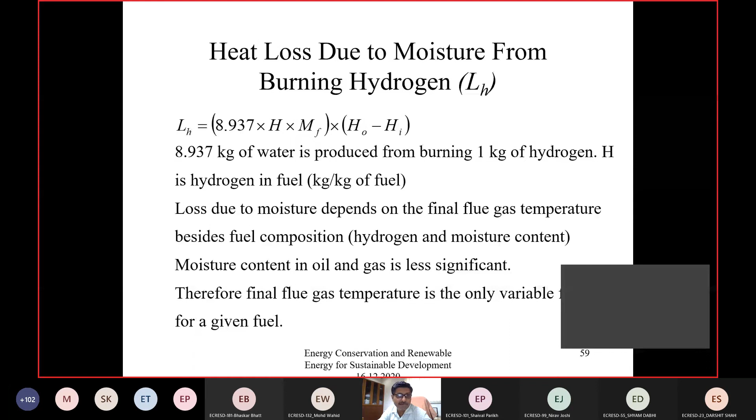So H is the hydrogen content, MF is the mass of fuel used, and HO and HI are the enthalpy levels at given pressure and temperature. LH is the amount of energy loss due to moisture from the burning hydrogen. If you evaluate this, and if you know the total quantity of heat supplied in the boiler by MF into CV, I can also find out the percentage loss.

Similarly, I can find out the percentage loss due to combustion in refuse. This is very, very interesting. Many times, the coal which we provide to the boiler, placed on the grate, remains unburnt and goes away with the fly ash. So it is the unburnt part of the fuel.

So you need to do the ash analysis to find the content of your dry refuse, that if my ash is 1 kg, suppose 10 gram is the fresh fuel going away with this dry ash. So MDR is the dry refuse in terms of kg per kg of fuel, MC is the unburned carbon in the refuse as a percentage, and MF is the amount of fuel consumed per hour basis.

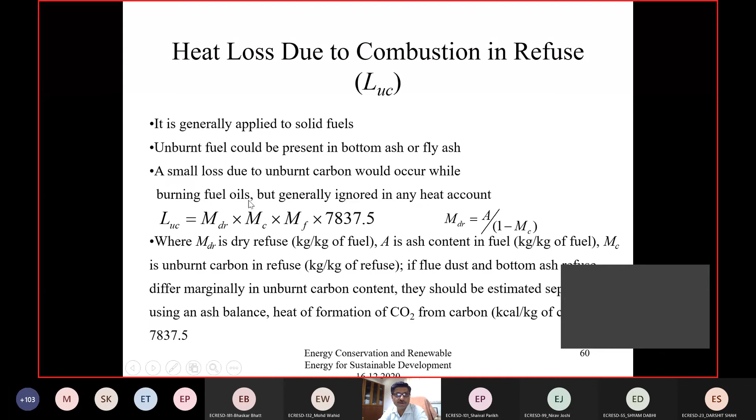And 7837 is the heat of formation of CO2 from carbon in kilocalorie per kg. We need to multiply by 7837, since 1 kg of carbon gives about 7837 kilocalorie per kg of energy when carbon is converted into carbon dioxide. So this gives the quantification of the heat loss due to combustion in refuse, which can similarly be converted into a percentage loss in efficiency.

Then there is sensible heat in bottom ash as well. Your bottom ash is at higher temperature, suppose the air temperature is 30 and the bottom ash temperature is suppose 300 degrees centigrade. So it contains heat, and typically it is a heat loss.

Again, it can be calculated in terms of M Cp delta T, where mass is the multiplication of MBA into MF, MBA being the bottom ash quantity in kg per kg of fuel, and MF the kg of fuel per hour.

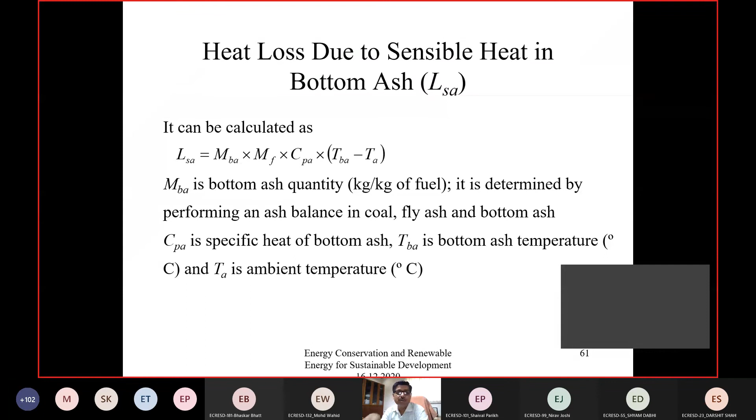So if I multiply, I'll get how much bottom ash is generated in one hour, and by MCP delta T, I'll get the heat loss due to the sensible heat in bottom ash as well.

There are some blowdown losses because we need to maintain the TDS level of the water, since the same water is recirculated. Because of the deposition of salt in the boiler tubes, the dissolved solid content increases. So in operating a boiler, every hour we need to blow down some water and replenish it. We are blowing down the water at higher temperature and supplying replacement water at room temperature. Typically, suppose I'm removing 100 liters of water every hour at 70 degrees centigrade and supplying water at 30 degrees centigrade.

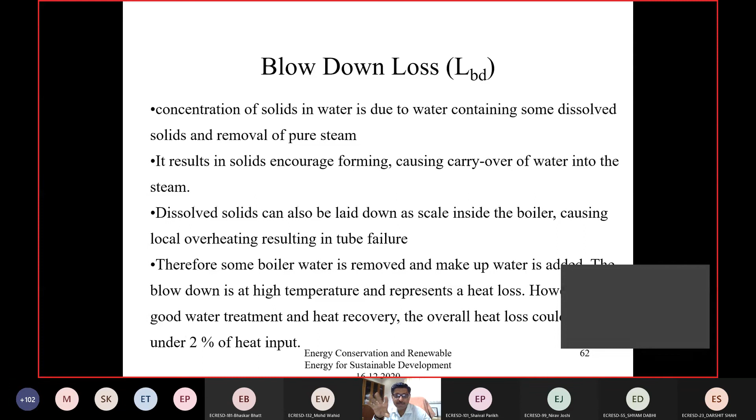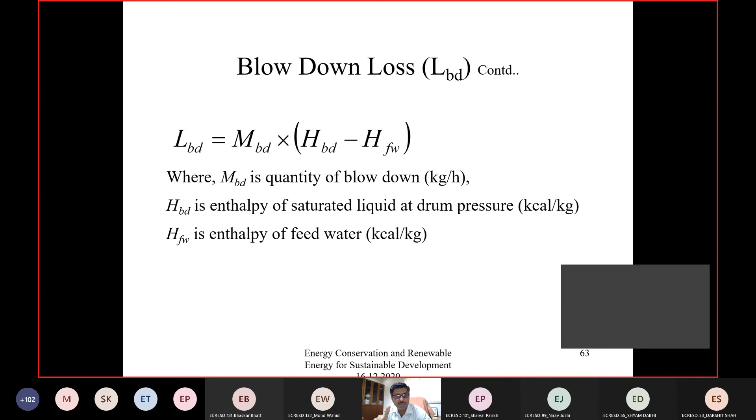So that 30 degree water is to be heated up to 70. That MCP delta T, whatever the difference is, is your blowdown loss, which is accounted as about 2% of heat input. You can calculate your blowdown loss using this: simply mass multiplied by the enthalpy difference of your blowdown water and the fresh water.

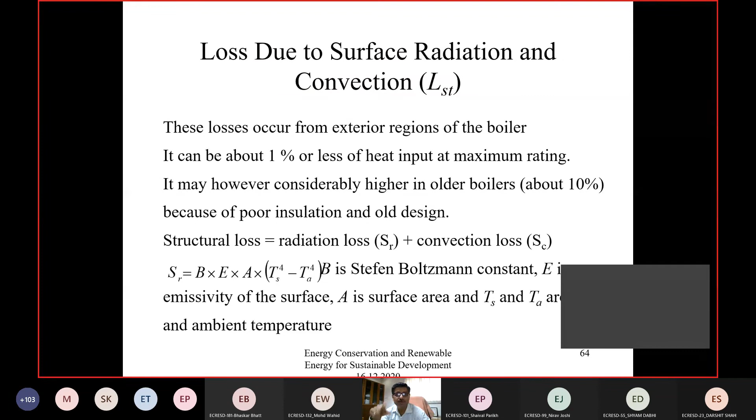There are some radiation and convection losses as well, which are calculated with Stefan Boltzmann's equation. However, we cannot get rid of the surface radiation and convection losses. They are there, so rather than address how these losses are to be reduced, we will only quantify the percentage of efficiency reduction because of the surface losses. After getting that, you can add up all these losses.

You subtract these losses from the heat input, and if you divide by the heat input, it will be the thermal efficiency. You will get the same thermal efficiency by your input-output model. Only the good part of doing this analysis is...

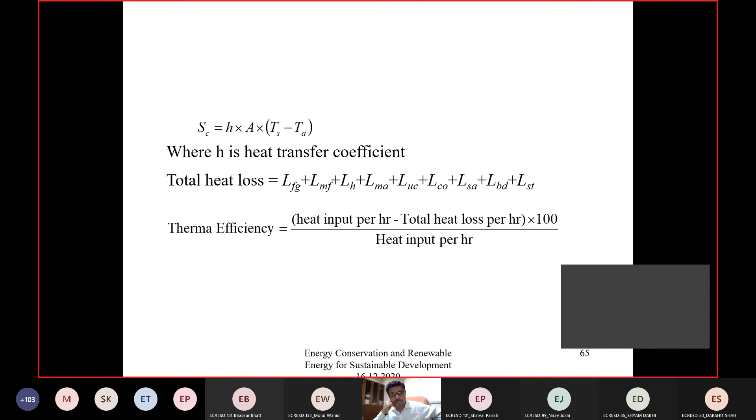you can know the quantification in each category, and if you find that your losses are more with reference to the reference case, you can address those issues and reduce these losses. Suppose flue gas losses are more, then you can think of having better design of your air preheater, superheater and economizer, which will reduce the losses, or rather we are using the heat available with the flue gas to generate some positive energy in the boiler.

So here I'll end my presentation, and I'm sure some of the issues, it's a very brief presentation. Those who wish to work on that can find relevant material and work accordingly. So just an insight is given by me, so that you can address really the conservation part and sustainability. Thank you.